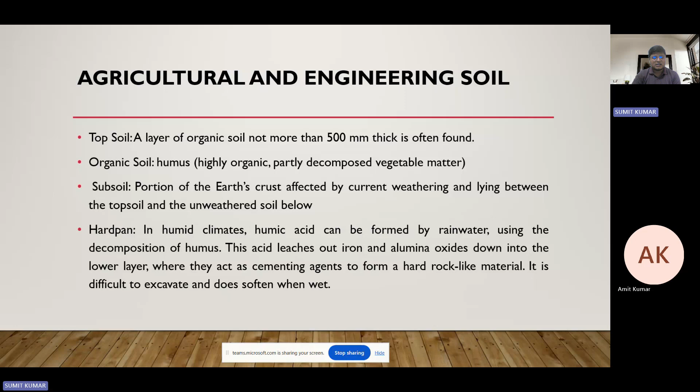So we have understood about the topsoil, organic soil, and subsoils. These are the pictorial representations which we have discussed in detail.

In addition, we understood that geologists classify all the earth's crust as rock. It might be a hard or soft deposit.

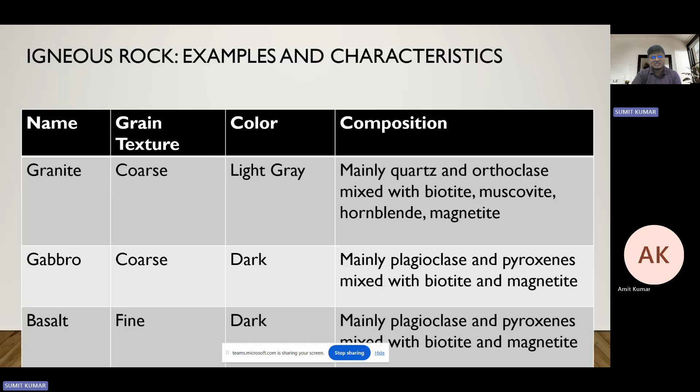And subsequently, we understood the rock cycle, in which we came across igneous rock, residual rock, metamorphic rock, and sedimentary rock - how their formations and properties, primarily igneous, sedimentary, and metamorphic, are discussed in detail, along with their property examples and textures through which we can identify them.

In the sedimentary rocks, what we mean by strata and how the property gets varied is elaborated, with examples and brief descriptions explained in the very first classes. Same for the metamorphic rock.

Afterwards, we classified soil on the basis of their formation, in which we came across transported soil, residual soil, and organic soil. In transported soil, there are some mediums which transport the soil from one place to another, in which water and air are some of the factors which carry the soil particles from one place to another for deposition purposes.

Apart from that, the residual soil resides at its parent component only - that is the residual soil. And the organic soil is formed by the decomposition of natural biological bodies like plants and animals - that is the organic soil, and its strength is also less.

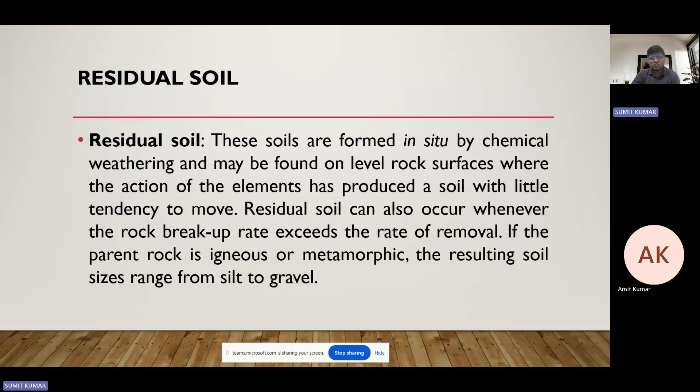How the soil gets formed there, based on the particles - when the flow starts, specifically for the transported soil, the large particles get deposited at the upstream section, and subsequently the fine particles move to the downward side. This was discussed in the earlier study. So residual soil and organic soil we have discussed in the very first class.

Afterwards, we came across properties like the two properties due to granular and cohesive soil - one is the shear strength parameter of soil.

So that we have understood, the examples are also discussed, and how they are different from the other engineering materials like steel and concrete is also elaborated.

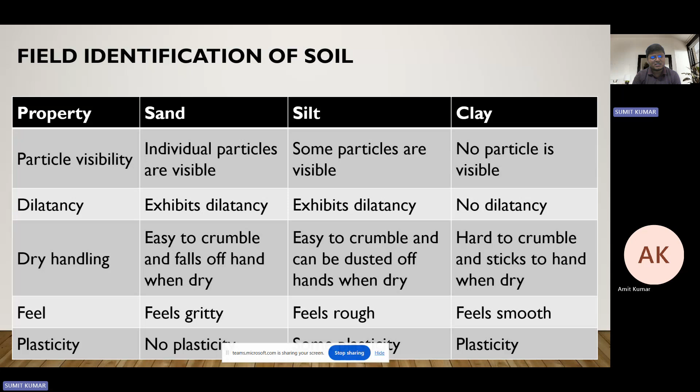Afterwards, some properties like permeability, compressibility, and shear strength, which are some characteristics of soil, are understood. Then how we identify the soil, whether it is sand, silt, or clay, based on the field identification method is discussed.

And then the sieve analysis and how percentage finer is retained, how we classify the soil system, is discussed.

So these are the major things which we have discussed in that class, followed by the week 2 class, in which we have understood the three-phase diagram, in which we have primarily discussed the three-phase system.

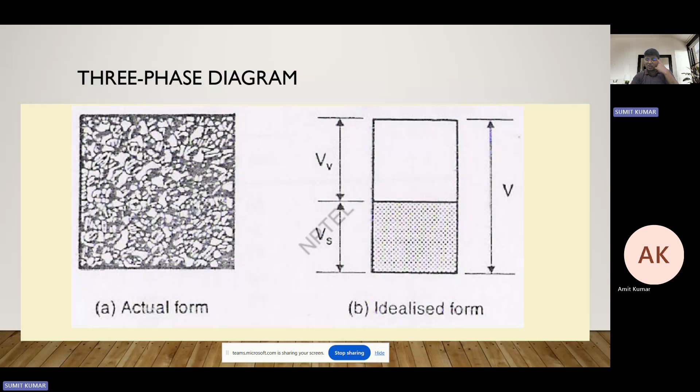We understood that in actual soil, air, and water, three mediums are present in the soil system. When we idealize it, it gets converted into volume of solid and volume of void. Volume of void is filled with either water or air, which makes it a three-phase system.

The various definitions like void ratio, volume of void by volume of solid, porosity, volume of void by total volume, is also discussed. Then subsequently the other parameters like GS, gamma, W is also discussed.

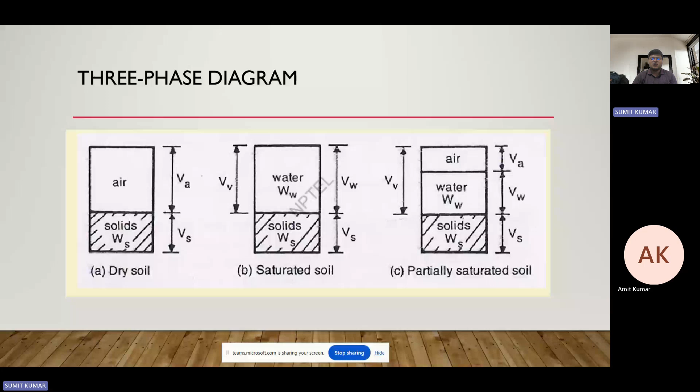While in the saturated system, all the air is replaced with water, so the solid and water only are present. But in actual, in maximum cases, the three-phase system is present, in which the volume of void is filled with air and water only, that is said to be the partially saturated soil.

Then we have defined the degree of saturation, in which we said that volume of water by volume of void, how much the volume of void is occupied by volume of water, represents the degree of saturation. And then the density unit - this is the basic thing which we discussed very deeply during that class.

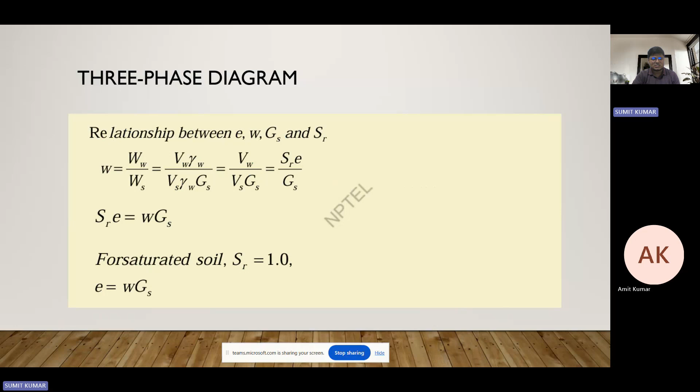Moving ahead, we understood several correlations which I think you must be aware of. Afterwards, we solved some numerical problems in which we calculated the water content, void ratio, and degree of saturation.

Then these problems we discussed, like how the volume of solid and the weight of solid remain constant, because that doesn't change irrespective of the places where we have to keep it.

And this is the basic relation which I have defined, that the volume of solid is equal to total volume by 1 plus e. So similarly, WS is equal to WT by 1 plus...

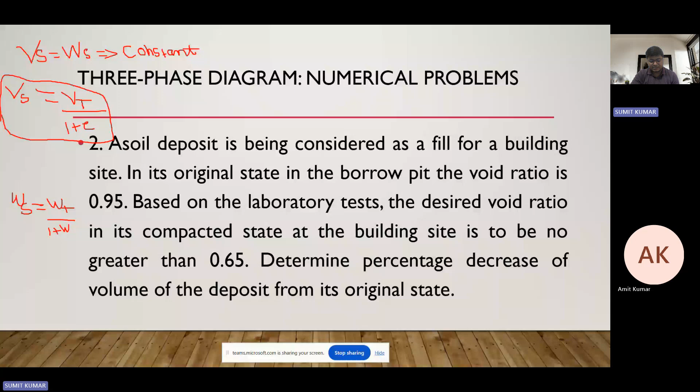Sorry, I have a little bit of a cough, so that's why it is a problem. That's why I tried to start a little early, so that I can cover the entire thing in the given duration. Okay, no problem.

So these problems we have discussed, I can skip the problem because we have discussed those in detail.

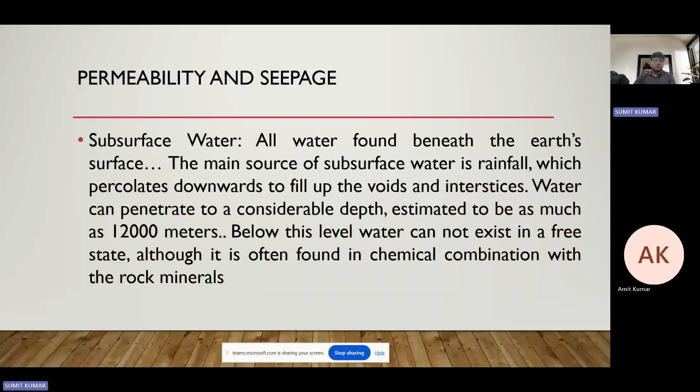After that, we came to permeability and seepage. Today we are going to solve many problems related to numerical problems which we have read in the earlier classes as well.

Okay, I'm sorry. Okay, so these things which we have understood in the previous classes, so I think now I can go ahead with the new content.

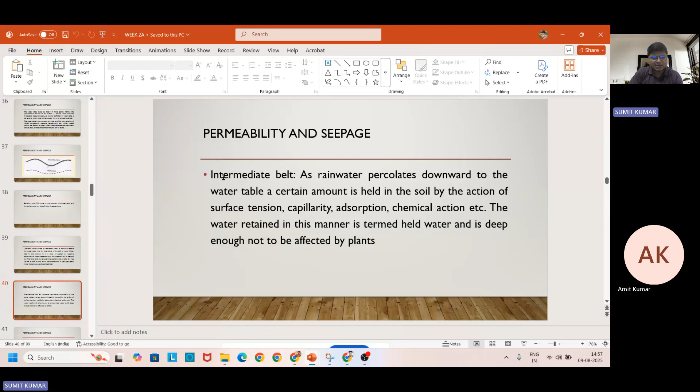These are the basic things which we have understood in the previous classes, like the aeration zone, saturation zone, rock flow zone. In addition to that, we have understood about liquid limit, plastic limit, natural water content. We also classified the soil on the basis of that only.

Then the consistency index and liquidity index is also discussed during those classes. So these are the major things which we have come across in the previous class.

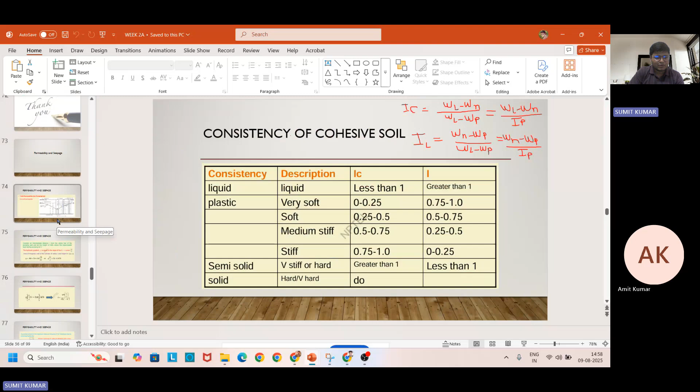Now I think we can move ahead with the new content. You see that this permeability and seepage concept which we have discussed for the unconfined aquifer, and subsequently for the confined aquifer, which we are going to use over here in the present class.

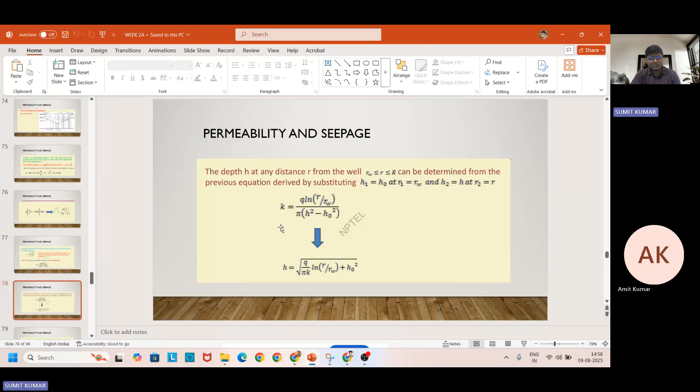Okay, so let me move with the new content and solve some problems related to it. So in today's class I will discuss the theory very briefly, and...

Sorry, sorry, give me a minute.

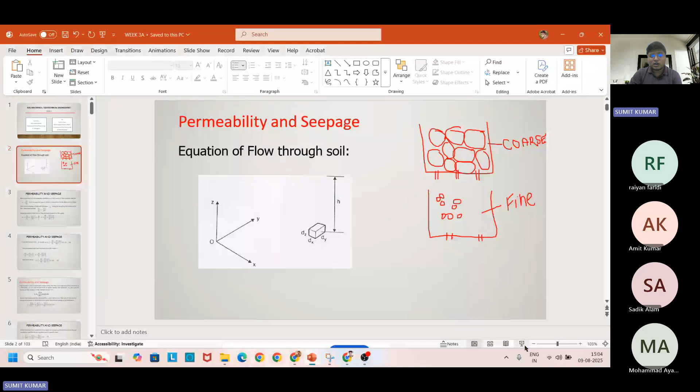Okay, so I am discussing permeability. I have explained how permeability is highest for coarse particles. Coarse particles like gravel have the highest permeability, followed by sand, followed by silt, and followed by clay. This range was also discussed in the previous class.

The PDF shared with you has that range. You need a rough idea, not exact size, because some MCQ questions may be framed in your assignment or the exam conducted at the end of the session covering this type of problem.

In addition, if you are going to give examinations like GATE or engineering services, problems related to permeability may be asked there, such as whether sand is more permeable than gravel. As we move ahead and talk about settlement, we will discuss this further when it comes.

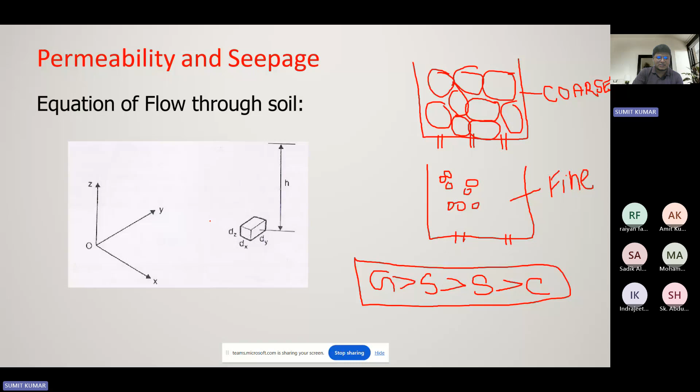Now moving ahead, we have developed the equation of flow through soil. We have taken a small amount of soil at height h from the surface, below the surface, and developed the equation. First, understand the simple concept of the component of hydraulic gradient.

Hydraulic gradient is nothing but head loss per unit length. The component of hydraulic gradient Ix at the center of the element will be del h upon del x. Here, h is the loss of head taking place between that element, and x is the distance through which the water flows out. A negative sign is there because the head loss is in that direction.

Okay, let me give you an example.

You may have read about open channel flow in fluid mechanics. When the flow takes place, we have a pressure tube or piezometer here, showing some head, which is the head of water.

The head of water gets reduced as the water moves downstream. So as we move in the x direction, this is h1 and this is h2. From h1 to h2, as we move in the positive x direction, h1 minus h2 is the head loss, but this head gets reduced as we move in the positive x direction.

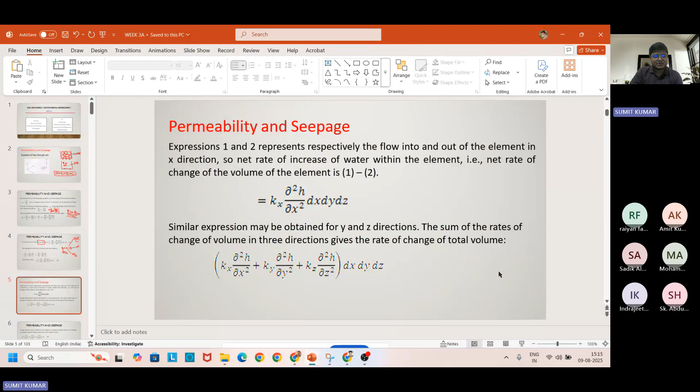So I am talking about the permeability and seepage analysis. We have understood that q equals kia, and how the volume takes place in different directions. kx, ky, kz could be different or could be same, but in general, in three-dimensional flow, we assume soil as isotropic. If soil is isotropic, it has kx, ky, kz same, because it has the same property in all directions.

Now let's understand two important terms: one is phi and another is psi, basically the equipotential line and flow line. These are two different things. As we go ahead we come across terms like Q equal to K, KH into NF by ND, like this. Let me pause this at this point of time, I will show you once the concept comes.

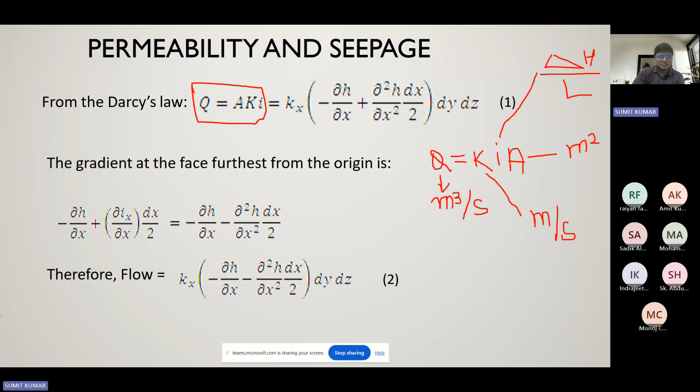del square phi upon del x square becomes k minus k del square h by del x square. From this condition, similarly for the z direction also, when we sum them, curl square phi, this becomes the Laplace equation, and these are the equations which form the Laplace equation for permeability and seepage.

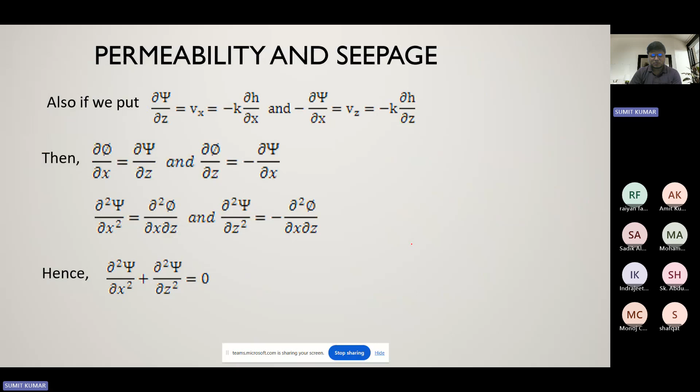When we go to the problems, you will understand the differences. So the flow line: the path which water particles follow in the course of seepage is known as the flow line. Water flows from point of high to low head, as I have shown in that figure. It makes smooth curves when changing directions. Hence, one can draw a series of smooth curves representing the path followed by the moving particles.

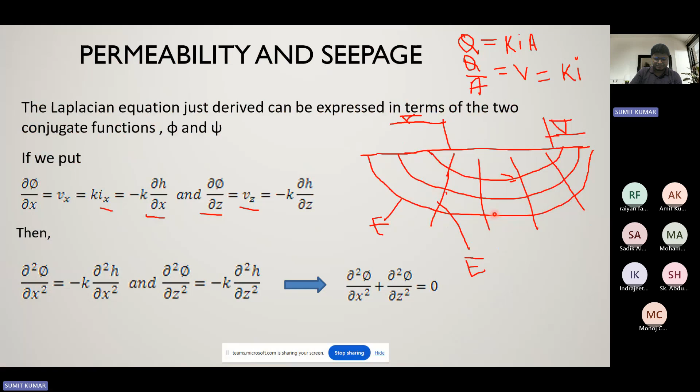Now we talk about the flow nets. The flow of water through the soil can be represented graphically by the flow net, a form of curvilinear net made up of flow lines intersected by equipotential lines, that is, the points joining equal head points. Over here you can see the flow net is developed, similar to the earlier picture.

Now I will use the laser pointer to elaborate. You see this is the flow line; as I move the laser from this point, this is the flow line, this is the flow line. In this direction the flow takes place. Similarly, this is the equipotential line. Along this line, the pressure head remains constant. These are the equipotential lines which we have discussed in the previous slide. And this is the flow channel through which the flow takes place.

So here again it is mentioned separately: this is the flow line, this is the flow line. The channel between the flow lines is called a flow channel, and these are the lines at which the potential, that is the pressure head, is the same — these are the equipotential lines. And this is the flow channel through which the flow takes place.

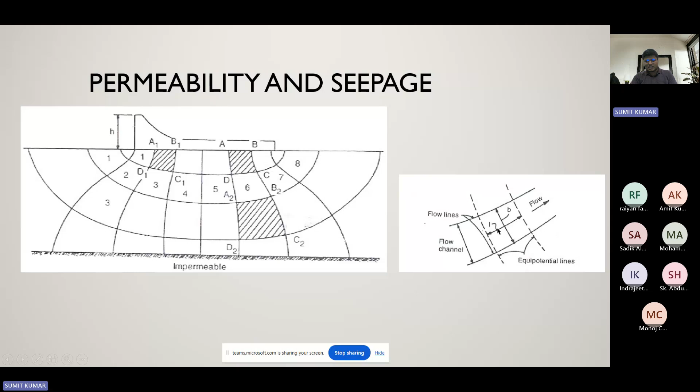So if L1 equals B1, L2 equals B2, then L equals B. When we have this arrangement in the figure, it is termed as a square, and the flow net is a square flow net, with the condition B1 by L1 equal to B2 by L2 equal to B by L.

So if it is a square ABCD, then delta Q equals delta Q1, and since ABCD has the same equipotential as A2, B2, C2, delta Q is also equal to delta Q1. And if delta Q equals delta Q1, then it is also equal to delta Q2 for any other square cross sections.

So the head loss between those subsequent sections, 1 and 2, delta H is also the same. Now we generalize it in terms of number of flow lines and number of equipotential drops. Hence, we can assume that H is the total head loss that takes place.

Over here, head is this. On the downstream side, head is this. Then the loss of head takes place between these two, each being delta H.

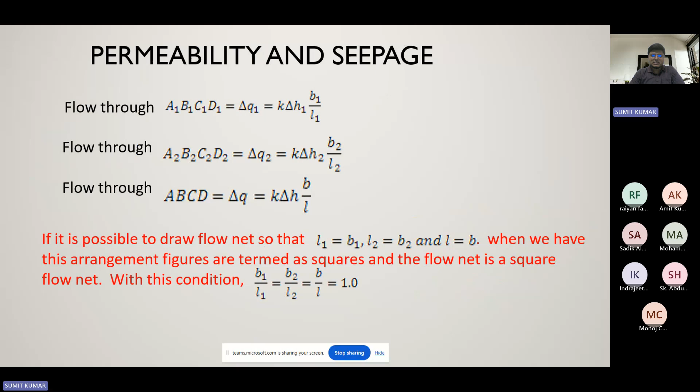Because we have assumed delta Q equals K into B into 1, this one is unit width. We have assumed unit width, that's why Q is calculated per unit length.

Now, again, we have shown a problem. Okay, so from this figure, you can see...

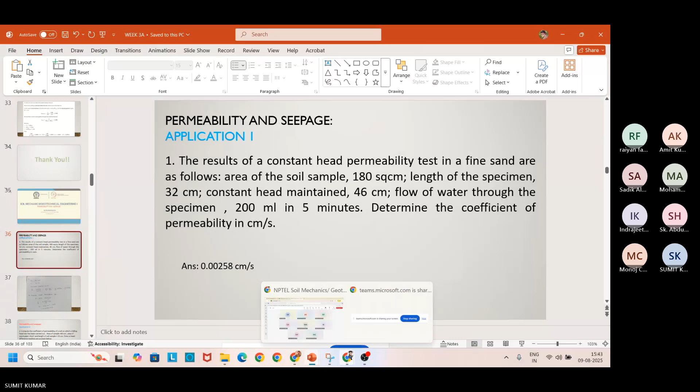So I've asked you to solve this problem. This question is very simple. It is solved on the basis of the basic concept, Q equal to KIA, which we have discussed as well. It is given that the result of a constant head permeability test in fine sand are as follows.

The area of sample is 180 square centimeter. The length of the specimen is 32 cm, and the constant head is maintained at 46 cm. The flow of water through the specimen is 200 ml in 5 minutes. We need to determine the coefficient of permeability in cm per second.

So I have solved this problem for you. The discharge Q is given as 200 ml per 5 minutes, and K needs to be calculated. I is also given, as the constant head is maintained at 46 cm and the length of the specimen is 32 cm. So 46 by 32 is the hydraulic gradient for this question, and 180 square centimeter is the area. If you put all these things together, you can solve this problem very easily.

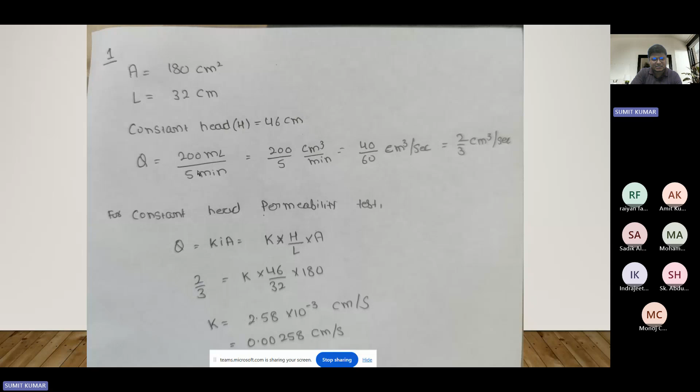I hope if you tried this at this point of time, you could have easily solved this problem. This is what you needed to solve in the 5-minute gap. I don't know whether you tried it or not, but I suggest you must try to solve the problems. If you don't try solving problems yourself, the learning remains inadequate.

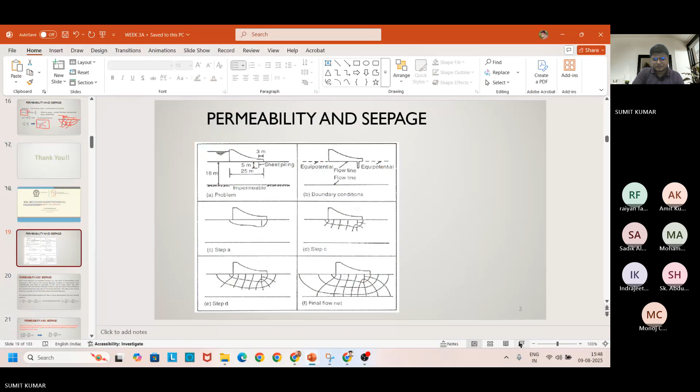Okay, so where was I before? I am here before we took a small break. Let me continue from here. Okay, so whether my audio is on or not, I'm audible, na? Hello, am I audible? Anyone can reply. Hello. Hello, Sadiq. Yes sir, you are audible, sir. Okay, okay. So we are here.

We have just understood that kH Nf by Nd, and over here our problem has been given, just for example, not any question. In figure A, you can see that a dam type structure gets created, and a sheet pile of 5 meter is also used on the downstream side. The width of the dam is 25 meter, and we usually calculate the discharge per unit length for this section, because we have assumed B into 1 as area, as the depth in the direction of the screen is considered as 1.

In B you can see the boundary conditions, like equipotentials shown for this type of condition. In step A, we draw the flow line, which is visible. In the next step, we draw the equipotential line. The equipotential line is drawn with the help of the piezometer. We find how much head is there at each point where the head is equal, join those points, and get the equipotential lines.

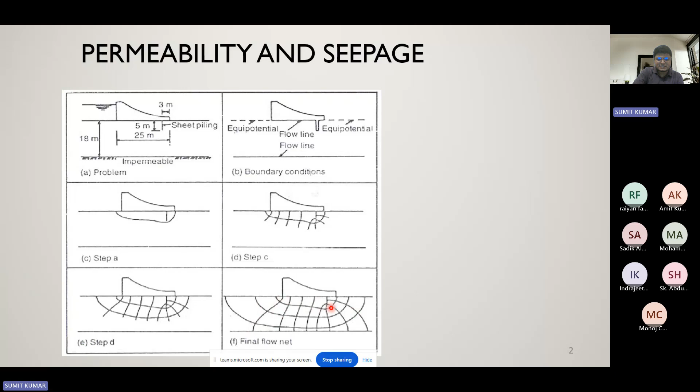We have joined the constant drop lines, we have joined the flow points, and the overall flow net gets formed. Now, we move ahead and see that the most loose deposits are probably isotropic, that is, the value of permeability in the horizontal is same as in the vertical direction.

The construction of earth dams and embankments involves spreading soil in loose layers and then compacting it. These construction techniques result in a greater value of permeability in the horizontal direction than in the vertical direction. The value in the vertical direction is usually 1/5 to 1/10 of the value in the horizontal direction. That could also vary, as we have already discussed.

The general differential equation for flow in the three-dimensional case, which we derived earlier, is written as kx into (d square h by dx square) plus ky into (d square h by dy square) plus kz into (d square h by dz square) equal to 0. Similarly, for the two-dimensional case, the terms d square h by dx square and d square h by dz square remain.

To transform these equations, a method is also sometimes used, in which... I'm telling about that...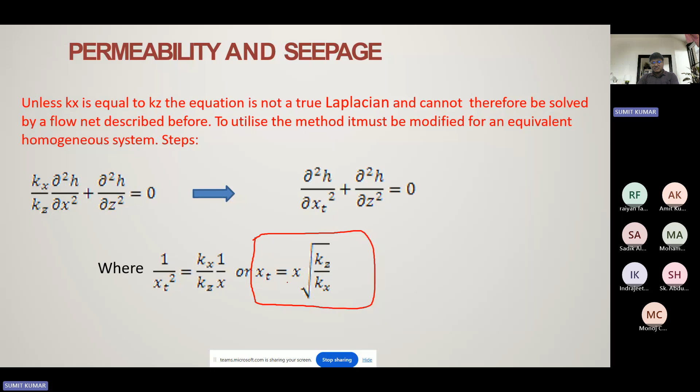If transformation is needed, then we do xt equal to x into root under (kz upon kx). And the modified equation is now a Laplacian and involves the two coordinate variables xt and z, and it can be solved by the flow net, provided that the net is drawn to a vertical scale of z and a horizontal scale of xt equal to x into root under (kz upon kx), where kz and kx are the permeability in the z and x direction respectively.

Now you see from this figure that the seepage quantity in the anisotropic soil, the head loss is denoted as delta H. In figure A, you can see this width is A. For the transformed width, it is converted into A into root under (kx upon kz), because we have to calculate A transformed. The equation here is...

xt equal to x into root under (kz by kx). So we need to calculate this x, we need to calculate this x, so this becomes xt into root under (kx upon kz). So root under (kx upon kz) into A is the transformed boundary.

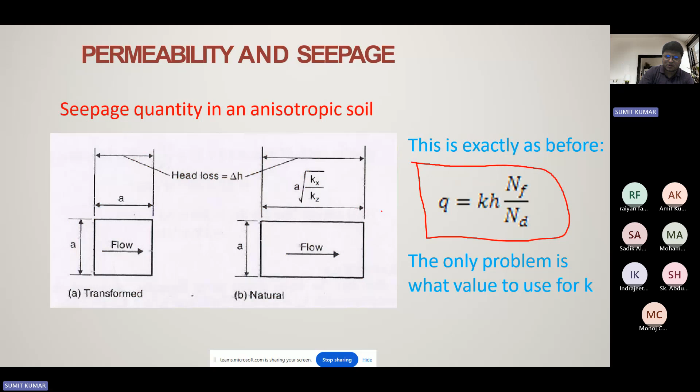Similarly, for A, both the transformed and original boundary are presented. So this equation remains the same as q equal to kh into nf by nd; just the value of transformation gets changed. So the only problem is what value of k is used. If k is the same for both cases, there is no problem; if it is different, then we use these conditions.

Now, one of the most important concepts is the k equivalent. If the permeability in x and z, even when we use the simple equation q equal to k i a, there also we assume an isotropic condition. If it is not an isotropic case, then the permeability value varies in different directions, and we have to calculate the equivalent permeability.

Using the transformed scale, a square flow net is drawn, and nf and nd are obtained. If we consider a square in the transformed flow net, it is shown in figure A. The same figure drawn to the natural scale, that is scale x equal to scale z, will appear as shown in figure B. Let ke be the effective permeability for the anisotropic condition; from figure A, q equal to A ke into delta H by A equal to ke into delta H.

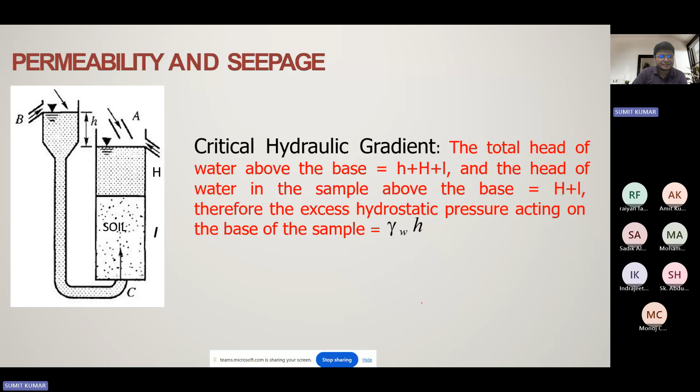Now, if any friction between the soil and the side of the container is ignored, then soil is on the point of being washed out when the downward force equals the upward forces. So downward force equals buoyant unit weight into volume, equal to gamma W into G minus 1 by 1 plus E into A into L. Upward force equals H into gamma W into A. Gamma W cancelled, A and A get cancelled, and i equal to H by L equal to G minus 1 upon 1 plus E. So the hydraulic gradient equation gets converted into I.

Critical hydraulic gradient IC equals GS minus 1 upon 1 plus E. So this is the basic condition which gets developed.

Now we move to the problem. We have approximately 6 or 7 problems which we will discuss before moving ahead. After discussing these problems, some destructive and non-destructive techniques used to get the soil in good condition before construction work, we are going to discuss. So first of all, start with this problem. I will read the problem, then follow with the solution which I already kept in the subsequent slide. We will discuss one by one.

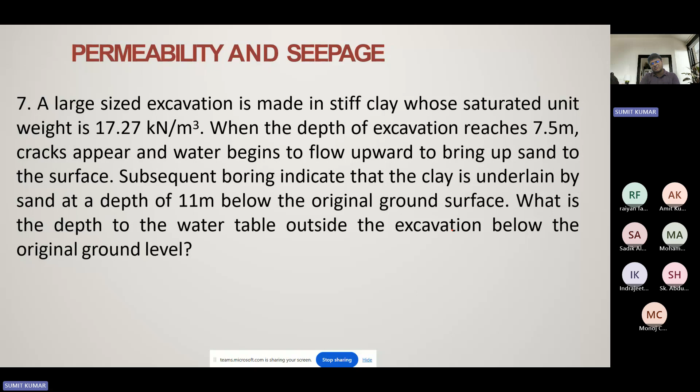So over here I have mentioned everything - saturated unit weight given is 17.27, depth of excavation is 7.5 meters. Then the crack and boiling sand plus water appear at 7.5 meters, indicating piping or heave due to upward seepage pressure. Apart from that, the additional condition given is that clay is underlain by sand at a depth of 11 meters.

The thickness of clay is given as 11 meters, and we need to find the depth of water table outside the excavation from the original ground surface. We know that uplift takes place when the effective stress is equal to pore water pressure. In that case only uplift, heaving, boiling takes place.

In this condition the upward seepage pressure overcomes the effective stress at the clay-sand interface. Here u is the pore water pressure while sigma dash is the effective pressure. Now we apply the principle of effective stress at the bottom of the clay layer.

We say that u, the pore water pressure at the bottom of the clay from outside the excavation, equals gamma w into (11 minus z), where z is the depth of water table below the ground surface. So pore water pressure is gamma w into (11 minus z), where gamma w equals 9.81.

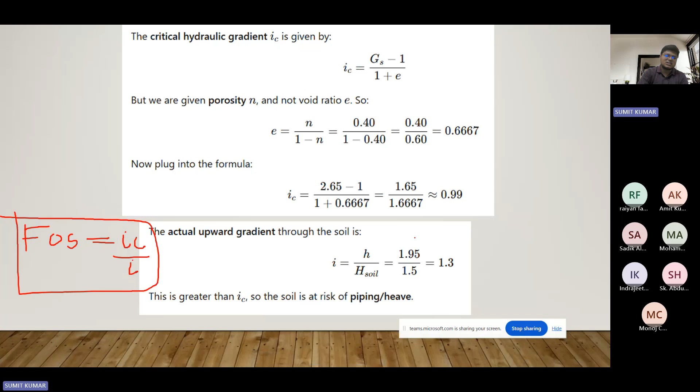So first, let the required thickness of flow path, sand plus soil, equal to H total, equal to the required gradient to get the factor of safety. I already said IC by I level equals factor of safety, because in the previous slide I said factor of safety equals IC by I. So the required factor of safety is 2.5, so I allowable equals IC by factor of safety.

So I allowable is 0.396. Now I total equals H. H is already fixed at 1.95 meter, and H soil is known to us as 1.5 meter. So H sand we need to calculate.

So we use I total equals H by H sand plus H soil equals 0.396. H is known, H soil is known, H sand is considered as X, and that value is found to be 3.424 meter by solving this. I think this is very much clear for everyone.

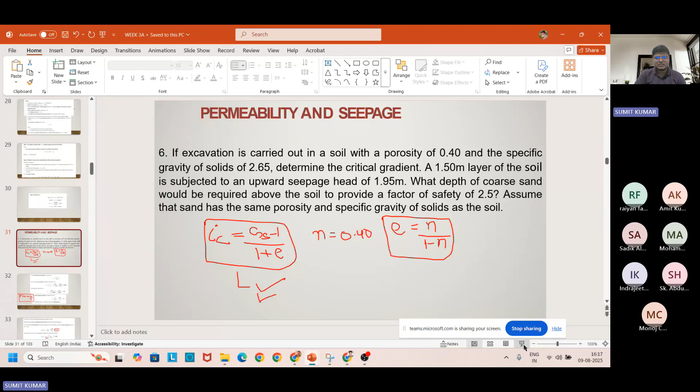Maybe I will solve a numerical problem in this manner only, very essentially, for the theoretical concept, because you already understood that in the sir's class. So the numerical solutions are not there, and I feel this solution helped you a lot. This question we already solved after the start of the break, so I move to the next one.

Now you see over here, there are various tests to calculate permeability, like the constant head and falling head tests. So this question is based upon the falling head test. It asks to compute the coefficient of permeability of soil on which the falling head test has been carried out, given that the area of the sample is 80 centimeters square, area of the standpipe is 4 centimeters square, length of the soil sample is 15 cm, and the time versus head difference reading: at time 0, head difference is 107; at 27 minutes it is 105; and at 60 it is 103.

Again, the given data: A equals 80 centimeters square, standpipe area small a is 4 cm square, length of soil sample L is 15 cm. The time versus head difference data is also presented here.

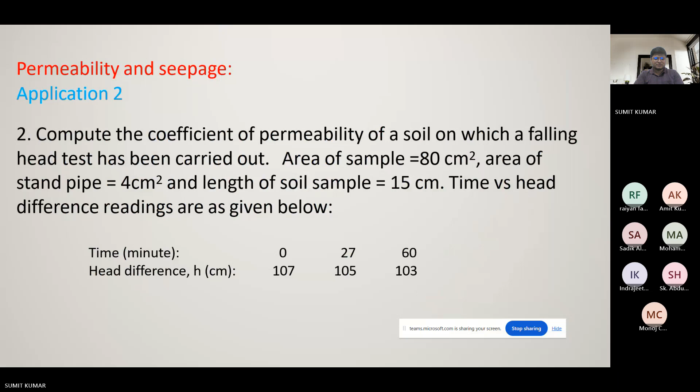Okay, so we will use these 2 points to compute the coefficient of permeability K using the falling head permeability test formula. K equals AL by AT, ln H1 by H2, where small a is the area of the standpipe, L is the length of the soil sample, capital A is the area of cross section, T is the time interval, and H1, H2 are the initial and final heads.

So first of all, we have calculated K as AL upon AT. Small a is 4, length is 15, so 4 into 15. Capital A is 80 centimeter square. T is 60 minus 0, basically 60 minutes, multiplied by ln of 107 by 103, because at t equal to 0, head is 107, and at t2 equal to 60, head is 103. With this, we are going to calculate.

So when we solve it, we first calculate 4 into 15 by 80 into 60, which gives 0.0125. Then we compute ln of 107 by 103. Merging all of them, we find K equal to 0.000476 centimeter per minute. When we convert it into centimeter per second, it is found to be 7.94 into 10 to the power minus 6 centimeter per second. If it needs to be obtained in meter per second, it comes out to be 7.94 into 10 to the power minus 8 meter per second.

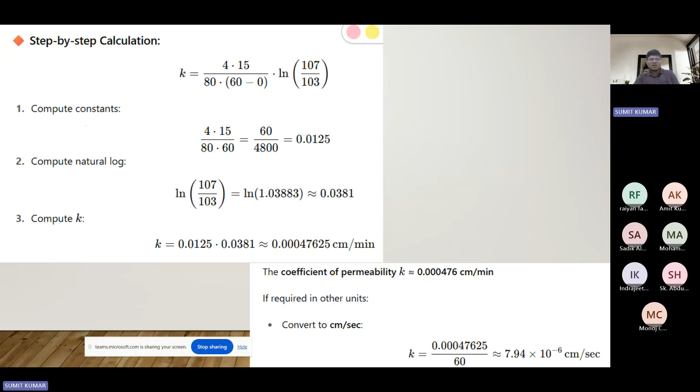Now I move to the next question, which states that for a field permeability test by pumping out, a well was sunk through a horizontal stratum of sand 15 meter thick, underlain by an impervious layer. Two observation wells were sunk at horizontal distances of 15 meter and 35 meter respectively from the pumping well. The initial position of the water level was 2 meters below ground level, and after steady state pumping at the rate of 925 liter per minute, the drawdown was found to be 2.5 meter and 1.3 meter respectively. We need to calculate the coefficient of permeability.

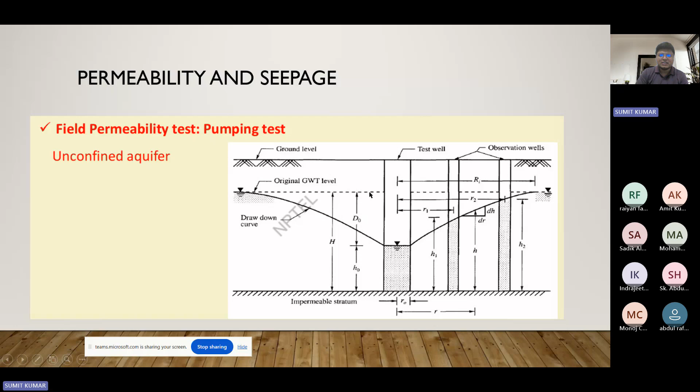This question is based on the concept of a confined aquifer, because the horizontal stratum of sand of 15 meter thick is where the water is present. You remember in the previous class we understood some concepts. Let me show you the PPT. In the previous class we understood the confined aquifer, and we also read about the unconfined aquifer. In an unconfined aquifer, we take water from the upper layer only, while in a confined aquifer, we take the water which is trapped between two impermeable layers, and from this we excavate the water.

Over here, K is calculated as Q into ln R by RW, divided by pi into H square minus H naught square, while over here we calculate K as Q ln R2 by R1, divided by 2 pi H into H2 minus H1.

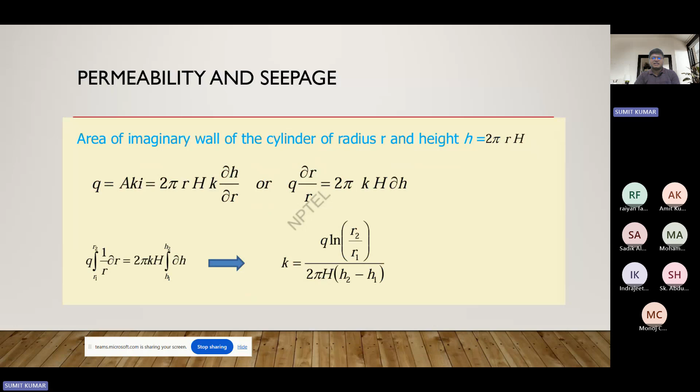So in the given problem, it is a confined aquifer, because if you read the problem again, it is clearly written that for a field permeability test by pumping out, a well was sunk through a horizontal stratum of sand 15 meter thick, underlain by an impervious layer. Basically, above is an impervious layer, after that a sand layer is present in which the water is there, and from there we are excavating water at the rate of 925 liter per minute. So what is the permeability, what K value do we need to calculate?

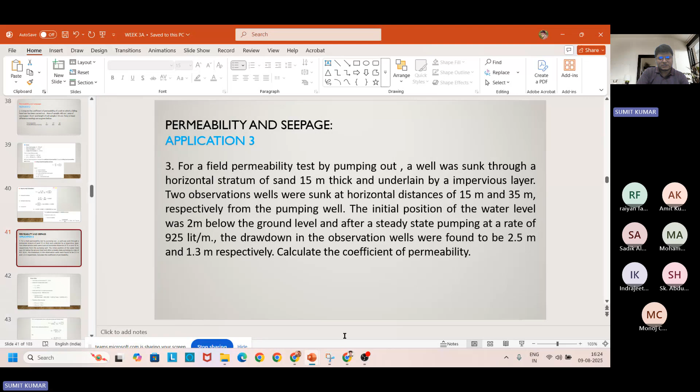So we use this equation only, in which K equals Q into ln of r2 upon r1, divided by 2 pi h, where h is the 15 meter thickness and h2 minus h1 is the head difference. Over here you see this is the 2 pi h value, and r2 is 35, r1 is 15, and 2.5 minus 1.3 gives h2 minus h1. So let's go step by step. I just showed the previous class concept to remind you what we have read and from where we are going to solve this problem.

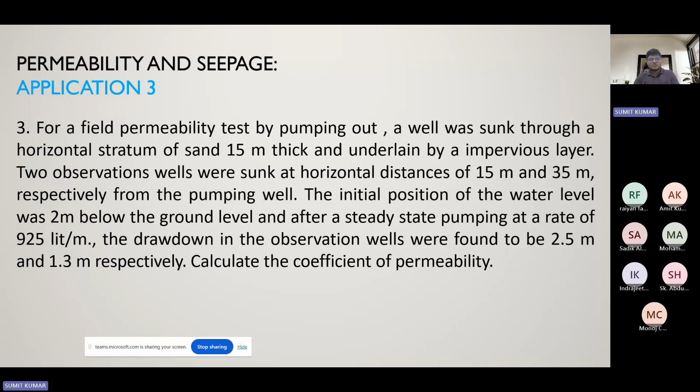It is given that the thickness of the stratum layer is b equal to 15 meter, which is the h in the formula from the previous class. The distance of observation wells R1 and R2 are 15 and 35 meter respectively. The initial water level is 2 meter below ground level, and the pumping rate is 925 liter per minute, converted into meter cube per second.

The drawdown is 2.5 and 1.3 at the radius of R1 and R2 respectively. For a confined aquifer, fully penetrating well, steady flow, the K equation is written as this, and when we calculate the value of K, it is found to be 0.000115 meter per second. There will be no doubt over here.

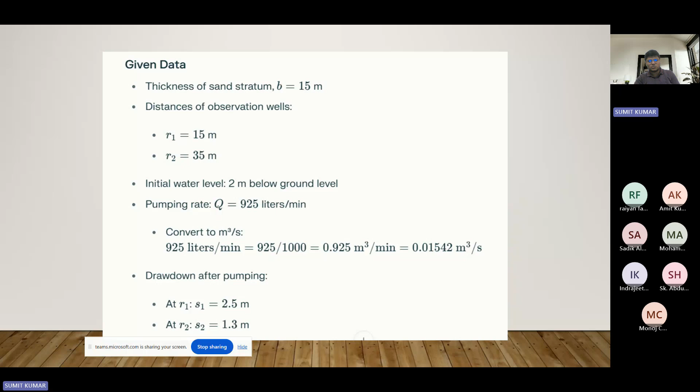We have used the Q value, which we already calculated as 0.01542. R2 by R1 is 35 by 15, that is 2.333, 2 pi b, and b is 15 meter, h2 minus h1 is 1.2 meter. That's what we used and calculated the value of K.

Now I move to the next problem: a bed of sand consists of three horizontal layers of equal thickness. The coefficient of permeability of both upper and lower layer is 4 into 10 to the power minus 4 mm per second, and for the middle layer 6 into 10 to the power minus 2 mm per second. What is the ratio of average permeability of the bed in the horizontal and vertical direction?

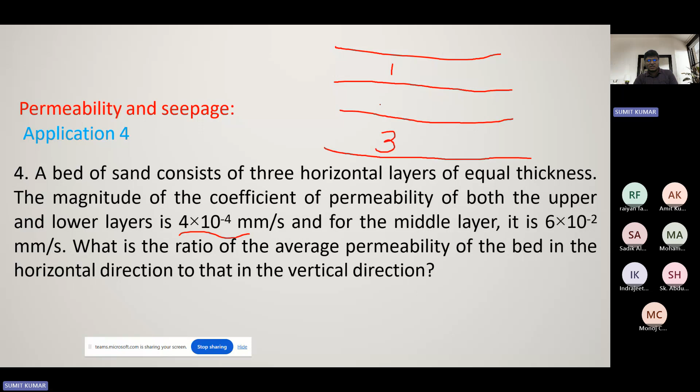The equations related to this were not discussed earlier, so with this problem I will write them. There are three layers of different permeability: upper, middle, and lower. For layers 1 and 3, the permeability is the same, 4 into 10 to the power minus 4 mm per second, while for the second layer it is 6 into 10 to the power minus 2 mm per second. So K1, K2, K3 denote the upper, middle, and lower layer.

K horizontal is K1H1 plus K2H2 plus K3H3, divided by H1 plus H2 plus H3. Taking H as unit thickness, it becomes K1 plus K2 plus K3 upon 3. So K horizontal is calculated as 0.02027 mm per second.

When we calculate K vertical, considering unit thickness, it is 3 divided by (1 by K1 plus 1 by K2 plus 1 by K3), which is found to be 0.000598. Now, for the ratio KH by KV, when we calculate it, it is found to be 33.94.

Is the thickness equal? Over here the thickness is assumed to be unit thickness, unit thickness.

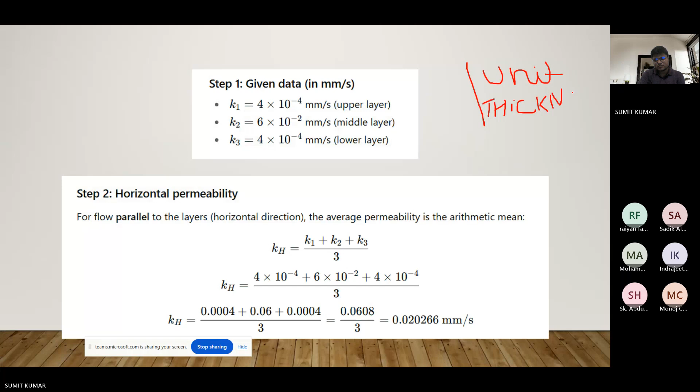So with this, the numerical problem kept for today is finished. Now I will move on to some other concepts very quickly and sum up today's class in some time.

I am talking about soil compaction, problematic geomaterials, and the potential problems. Talking about the type of geomaterial like soft clay: it has low strength, high compressibility, large creep deformation, low permeability. Silt also has very low strength and high compressibility, and permeability is also less. As already discussed earlier in this class, coarse grained soil has high permeability while silt and clay have very less permeability.

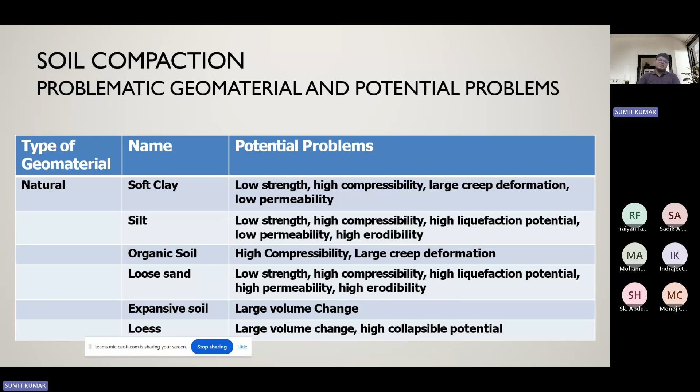Organic soil has high compressibility and large creep deformation. Loose sand has low strength, high compressibility, high liquefaction potential, high permeability, and high erodibility. Expansive soil has large volume change, and loess has large volume change with high collapsible potential.

Moving ahead, talking about the type of geomaterial, uncontrolled fill is when there is no control over the field conditions in which it is kept. Their strength is also less and they are highly compressible.

Dredged material has high water content, low strength, and high compressibility. Reclaimed fill also has higher water content, low strength, and high compressibility, while recycled material has non-uniformity and high variability of properties. Solid waste has low strength, high compressibility, non-uniformity, and high degradation potential.

The bio-based byproducts have low strength, high compressibility, and high degradation potential.

Talking about soil compaction. Compaction means to press closely together. In soil mechanics, it means pressing the soil particles tightly together, expelling the air from the void spaces. That is the main purpose.

Also, at some point afterwards, water is also added so that the voids get filled with water. Then we do compaction till all the water voids also get pushed out so that future consolidation is prevented. Consolidation also results in reduction in the void ratio, but consolidation and compaction are not the same.

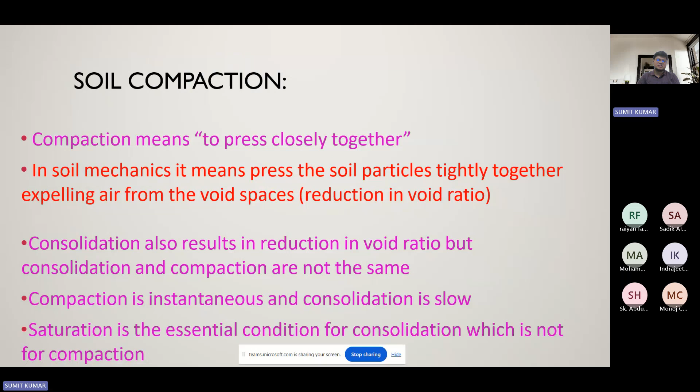Saturation is an essential condition for consolidation, which is not the case for compaction. For compaction, saturation is not essential, but for consolidation it is essential.

Talking about the purpose of compaction: compaction increases soil density and produces three important effects. First is an increase in soil shear strength, and decrease in future settlement of soil.

And decreases permeability. These three effects are beneficial for construction of various types of earth structures, namely highway, airfield, earth dam, etc. The greater the compaction, the greater the benefit.

Compaction is a cheap and effective way for improvement of soil properties.

The conventional use of rollers and plates is to repeatedly apply static pressure for soil compaction, along with kneading action, vibration, and ground surface to densify geomaterials. These are used. You have also seen this in various highway construction when the soil is put down, these types of rollers are usually used.

And some water tanks are also present there, which are used to drop water. Then the roller is run over there to achieve the optimum moisture content and the maximum dry density.

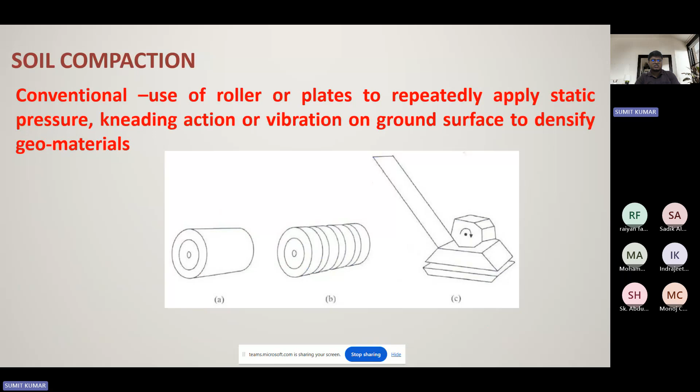Compaction is quantified by the dry unit weight, which can be computed in terms of the bulk unit weight and the moisture content.

In most cases, the dry soil can be best compacted if a certain amount of water is added to it, as water acts as a lubricant for soil particles to pack together. If, however, too much water is added, it results in lesser density.

Thus, for a given compaction effort, there is a particular moisture content at which the dry unit weight is greatest and compaction is best. This moisture content is called optimum moisture content, and the associated dry unit weight is said to be the maximum dry unit weight.

So when you draw the dry unit weight versus moisture content graph, this type of curve is formed, and the optimum moisture content and maximum dry density is achieved at the peak. That moisture content is said to be the optimum moisture content.

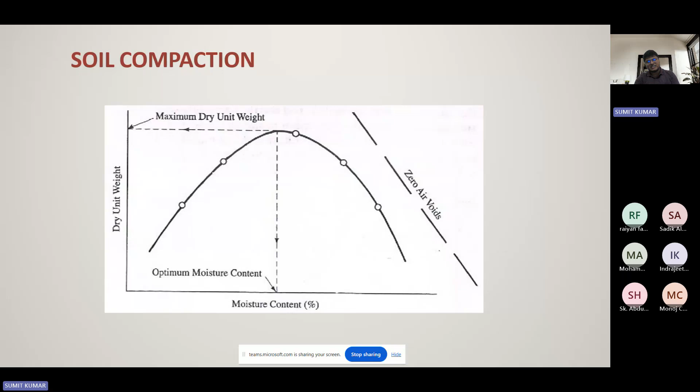In addition, when the compaction effort increases, the optimum moisture content gets reduced and the maximum dry density gets increased. I think this might be discussed here only.

Some of the instruments used in soil compaction include the smooth wheel roller, which you have seen on various roadway constructions. Smooth wheel rollers employ two or three steel rollers.

It is useful in compacting the base courses and paving mixtures, and is also used to provide a smooth finished grade. The smooth wheel roller provides compactive effort through, using its self weight.

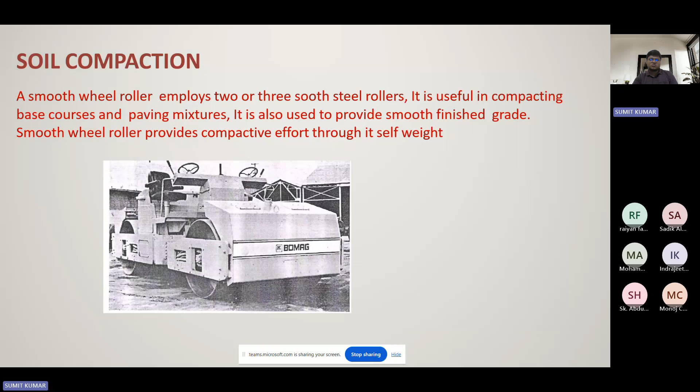Clayey soils and silty soils can be compacted effectively by this type of roller. It is also suitable for granular soil containing a small amount of fines.

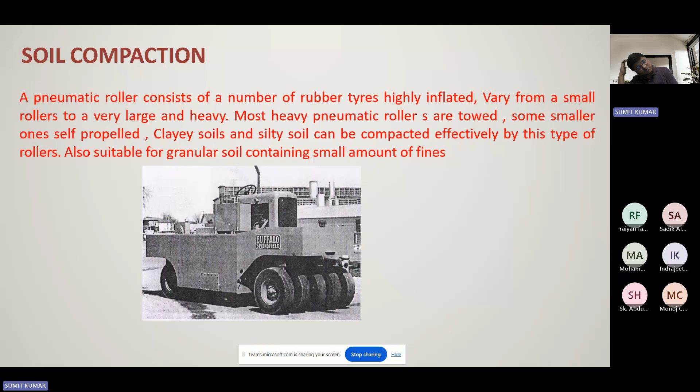Next one is a vibratory roller. It contains some kind of vibrating unit that imparts an up and down vibration to the roller as it is pulled over the soil. The vibrating unit can supply a frequency of vibration at 1500 to 2000 cycles per minute, depending on the compacting requirements. They are effective in compacting granular materials, particularly clean sands and gravels.

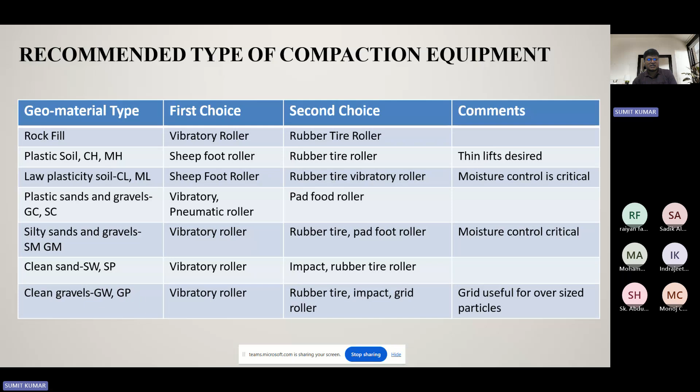Like the question asked: for rock fill, which type of roller is the first choice? So the vibratory roller. What type of rollers are the correct options? Option A is vibratory, second is rubber tire, and third is impact roller. So you have to select A and B only. This type of option could be asked in the examinations.

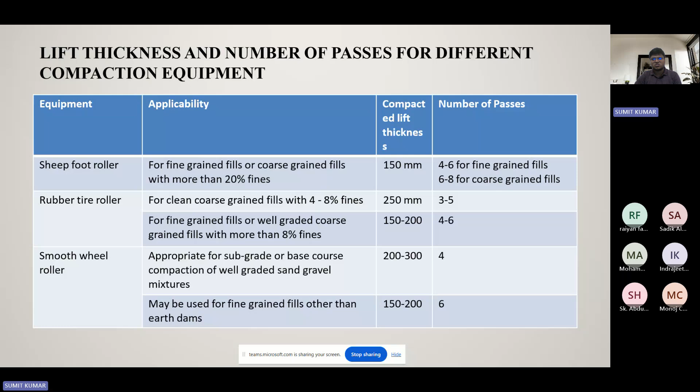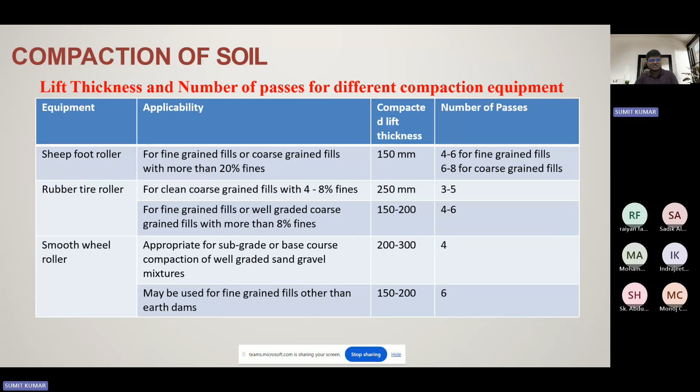That is only carried forward for the lift thickness and number of passes for the different compaction equipment. Now let's move to the next section.

Now we are talking about the application. Conventional compaction has been used for earthwork such as roads, dams, embankments, slopes, parking lots, and sport fields. The advantage of this is that construction equipment is readily available. It is a well-established ground improvement method that has a long history and extensive knowledge in the industry.

Talking about the limitations: the depth of improvement is limited, mainly used for fill and not for in-situ natural geomaterials. Geomaterials should be within moisture content close to the optimum moisture content to be more effective. It is challenging to achieve uniform compaction of the geomaterial over a large area.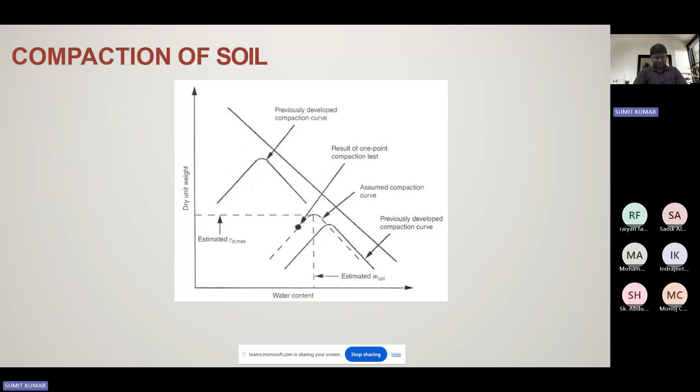Now talking about quality control and assurance: these are an important part of conventional compaction because it often involves a large area of construction. Quality control typically indicates the quality of fill materials such as the type and gradation and Atterberg limits, the type and weight of equipment, lift thickness, moisture content at compaction, and number of passes.

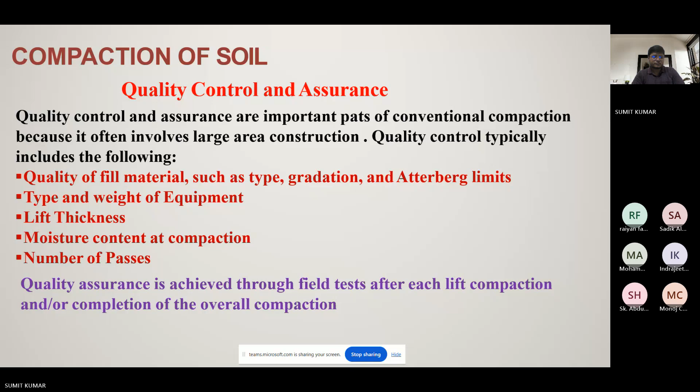Now moving to a non-destructive test: the apparatus is placed on the ground on the compacted fill and emits gamma rays through the soil. Some of the gamma rays will be absorbed, others will reach the detector. The soil unit weight is inversely proportional to the amount of radiation that reaches the detector.

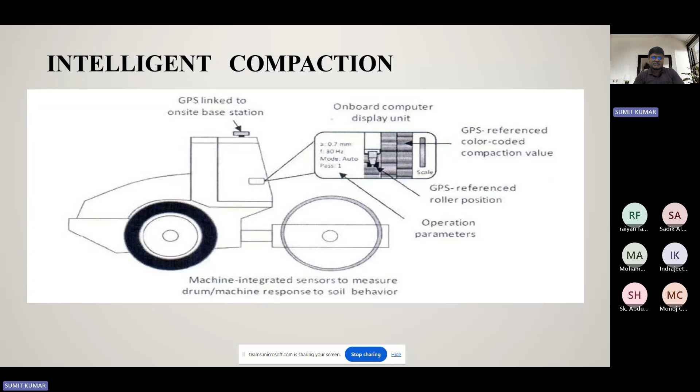Similarly, intelligent compaction is also a non-destructive technique in which a continuous construction process with quality assurance and control is incorporated. This technique includes automatic measurement of geomaterial properties through pre-installed sensors on the machines, and adjustment and optimization of vibration, amplitude, frequency, and/or speed using a feedback control system by the machine operator to achieve uniform compaction and the desired target value. Suitability and application are the same as for conventional compaction rollers.

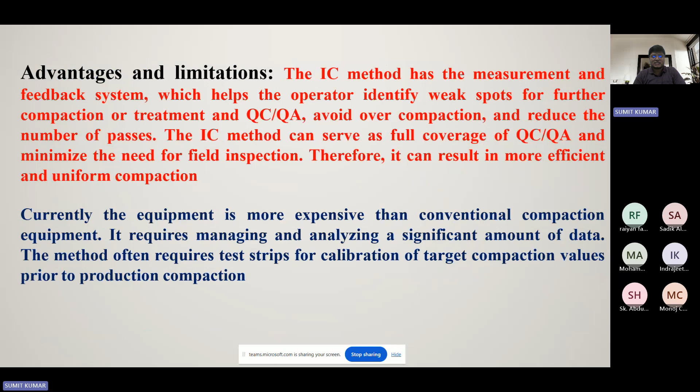Talking about the advantage and limitation, the IC method has a measurement and feedback system which helps the operator identify the weak spots for further compaction or treatment, and QC to avoid over compaction. Currently, the equipment is more expensive than conventional compaction equipment, so it requires managing and analyzing a significant amount of data. This method often requires test strips for calibration of the target compaction value prior to the production compaction.

So with this, all the things which need to be discussed for today's class are summed up. Now we move to some questions very quickly. First question: which law governs the flow of water through soil under laminar condition? Options are Newton's law, Darcy's law, Fick's law, Pascal's law. If you are aware, during this class one can answer this easily, that is Darcy's law.

The second question: the coefficient of permeability has a unit. This was also asked in the previous class, that is meter per second, option B. Third: Darcy's law is valid for flow in soil through turbulent, laminar, transition, or uniform flow. This question was also there in the previous class. Option B, laminar flow, is the correct answer.

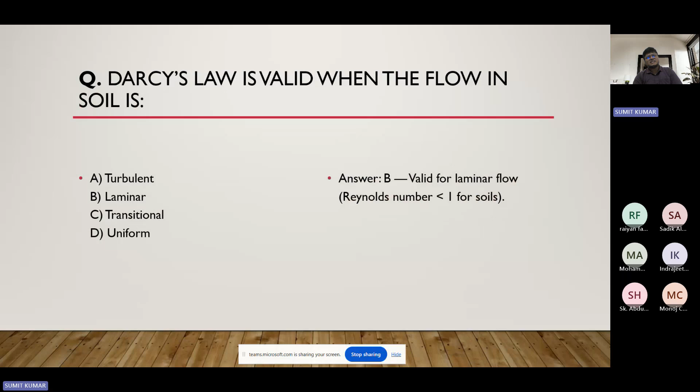Next: which soil type has the highest permeability? Options are clay, gravel, silt, loam. So gravel is the correct answer. If you remember, I said this in the previous class as well.

Constant head permeability test is best suited for, we have solved this problem in this class also, that is sand. Option C, for the coarse grained soil with higher permeability.

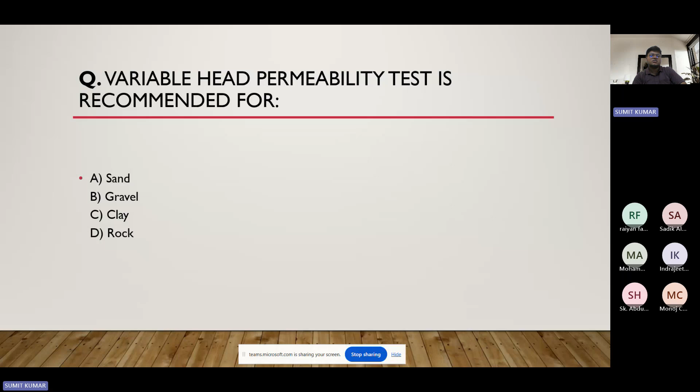Next question: the variable head permeability test is recommended for. We have performed the variable head permeability test for option number C, that is clay, because here the head varies, and clay has less permeability also.

Permeability and anisotropy in stratified soil means the permeability is same in all directions... I think option number B is the correct answer. Anisotropy, not isotropy, right?

Next is, seepage velocity is always equal to, or seepage velocity is always greater than the discharge velocity. Option C, right? Because seepage velocity equals discharge velocity divided by n, and n is less than 1, so seepage velocity is always greater than discharge velocity.

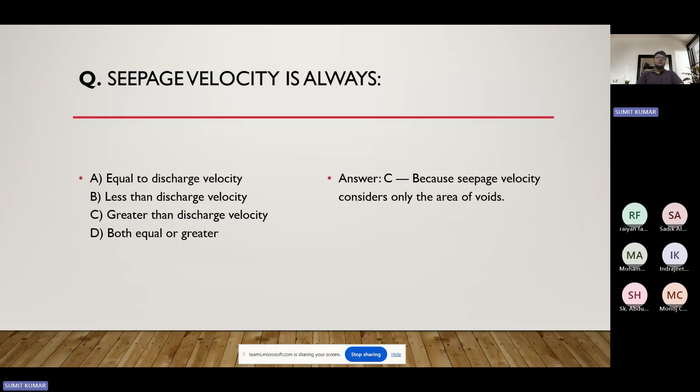In a flow, the net quantity of seepage is proportional to NF by ND. This option is not written correctly, so option C may be mentioned correctly, that is NF by ND.

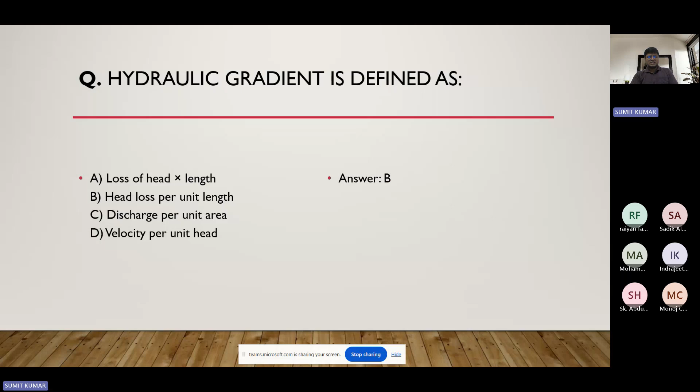Next is, the hydraulic gradient is defined as head loss per unit length. Option number B. Next is this question.

Next one is also a numerical problem, you solve by yourself, it will be there in the PDF. In Darcy's law, discharge velocity is directly proportional, V equals KIA. So option C, V equals KI, where K is the coefficient and I is the hydraulic gradient, right?